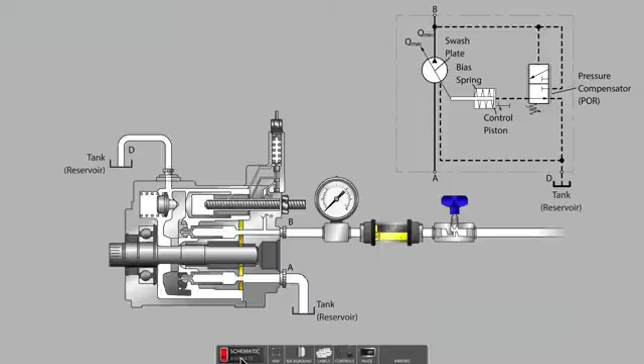Assuming you have some basic knowledge about the 9, sometimes 7, pistons in the cylinder barrel that are drawing in fluid through half of the shaft rotation and expelling fluid through the other half, let's now look at how this pump can vary its displacement, and let's look at the function of a controller mounted to this type of pump, typically known as the pressure compensator.

When you see the green highlighting appear, don't forget to have a look at the matching symbol in the upper right-hand corner of the screen.

Other typical names for pressure compensator are pressure override and pressure cutoff. All of these terms describe a feature that may allow us to go without a relief valve, as is commonly found mounted to a T-fitting on the outlet line of a fixed displacement pump.

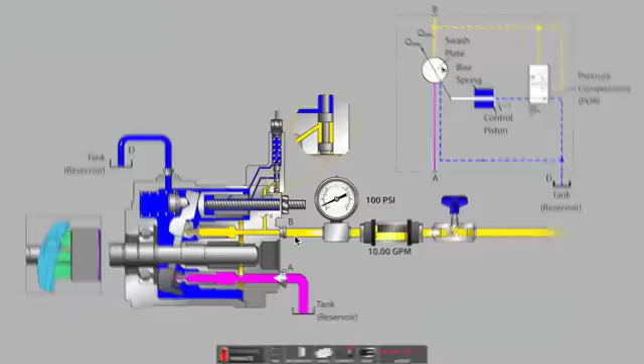Let's look at just a few common components that we will be speaking of throughout the video. The inlet line A is shown in violet, with the cylinder barrel assumed to be spinning as shown in the 3-dimensional mimic. And the pump output or discharge port is shown here at port B.

This is the swash plate. There is also a very important component called the control piston, and a component known as the bias spring.

The pressure compensator has an adjustment screw, a spring, and a compensator spool. The compensator has an inlet port that is monitoring the outlet pressure, as shown on this line with the jump tags labeled lowercase letter a, that passes behind the volume stop screw.

We'll speak more about the volume stop screw to limit the pump volume output in a Part 2 video. We've installed a needle valve to act as a generic hydraulic system circuit resistance.

Closing down on the pump's outlet line is going to allow us to build system pressure on the pump's outlet port. On the controls, we have 2 adjustment dials, one coarse adjustment and one fine adjustment, but they ultimately both control the same needle valve. Using the 2 different dials is just for teaching convenience, as a real needle valve typically has only one adjustment.

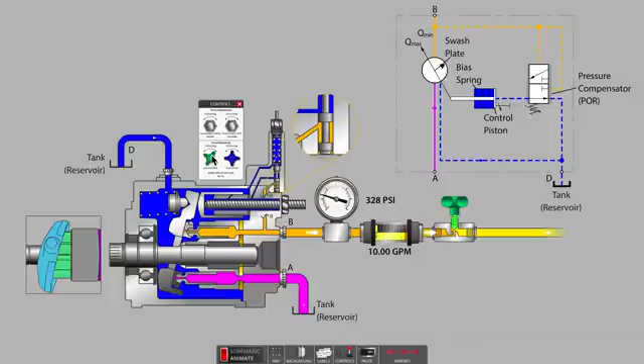Let's tighten the setting of the needle valve to cause greater circuit resistance. Naturally, this causes our system pressure to rise. Just after passing the 400 psi mark, we notice that the pump's pressure compensator has become active. Also notice that the swash plate is now moving, and the flow meter indicates less than full value.

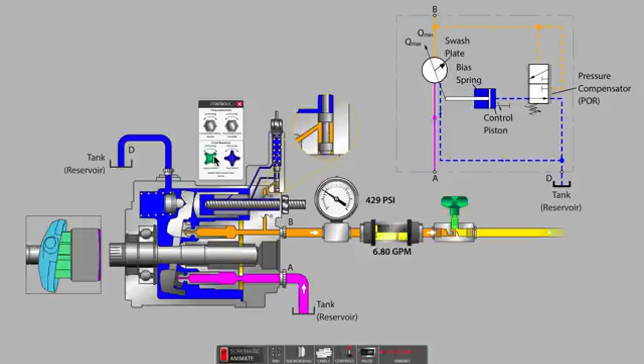Remember, we started out with 10 gallons per minute. As we continue to tighten the needle valve, we eventually arrive at a circuit pressure of 500 psi, and we find that the flow meter now indicates 0 flow.

Naturally, there is 0 flow on the pump outlet line, as the needle valve has been closed completely. If this was a fixed displacement pump, a relief valve mounted to a T-fitting right near the pump outlet would have to divert the pump's flow back to tank in order to avoid a catastrophic overpressure condition.

The pressure compensated pump is also referred to as a variable displacement pump. When there is no flow path, as is the case with our closed needle valve, the pump simply resizes itself to produce near 0 flow.

The resizing of the pump is accomplished by taking pump outlet fluid and using it to extend the control piston. When the swash plate moves towards the vertical position, the individual pumping pistons in the cylinder barrel now have a near zero stroke length. The pump is maintaining 500 psi maximum system pressure on the outlet line.

In every piston pump, some fluid is leaking internally between close-fitting parts. When the swash plate is perfectly vertical, this leakage causes the system pressure to drop slightly.

The spring inside the pressure compensator pushes the spool downward to the closed position. This allows the bias spring to push the swash plate back towards the maximum angle, which would increase the stroke length of the individual pumping pistons.

But since the needle valve is still closed, and there is no flow path available, system pressure quickly reaches the setting of the pressure compensator spring, and the control piston once again moves the swash plate towards the 0-degree angle, where no pump outlet flow occurs.

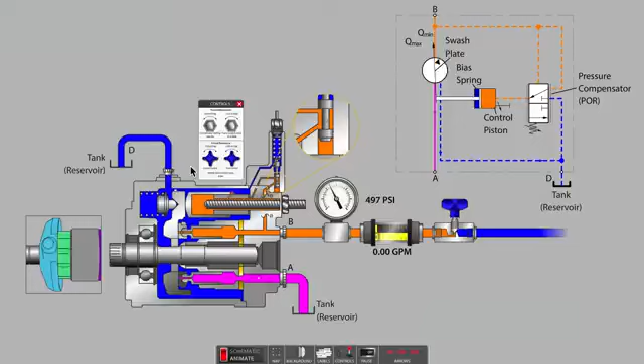The action of the pressure compensator is essentially maintaining a constant pressure. If the hydraulic system requires a top system pressure of say 1000 psi, we will need to adjust the pressure compensator spring. This adjustment needs to be made when there is no flow possible on the pump's outlet.

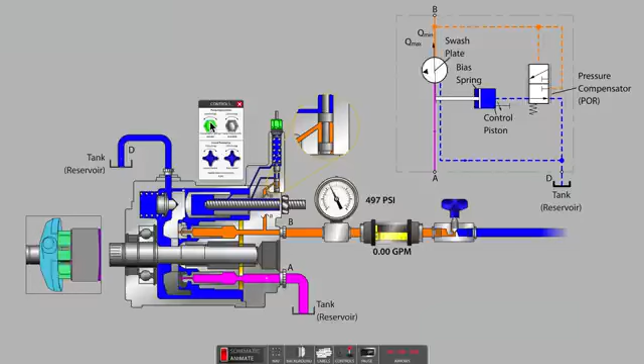In many systems, it simply requires one to stop operating the directional valves. In this system, we have a closed needle valve, so we are ready to make the adjustment. With a pressure gauge available on the pump outlet line, simply turn the adjustment screw to compress the spring until the desired maximum system pressure is reached.

When we open the needle valve, pressure will fall and the pump will return to maximum displacement due to the force of the bias spring. That is the meaning of the bias spring: it means that the pump has a tendency to produce maximum flow whenever possible.

As you can see, when there is an easy flow path for the pump's displacement, changing the setting of the pressure compensator spring has no impact at all on system pressure. In a real-world hydraulic system, the maximum system pressure limit would now be unknown. This could easily become a dangerous situation.

The pressure compensator adjustment must be set with the pump running and when there is no system flow occurring.

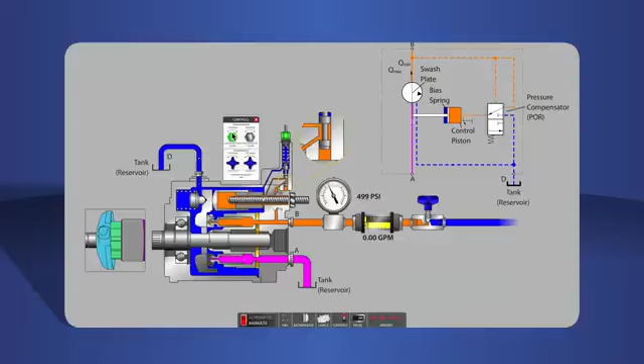In this video, we have covered the basic function and adjustment of the pressure compensator.